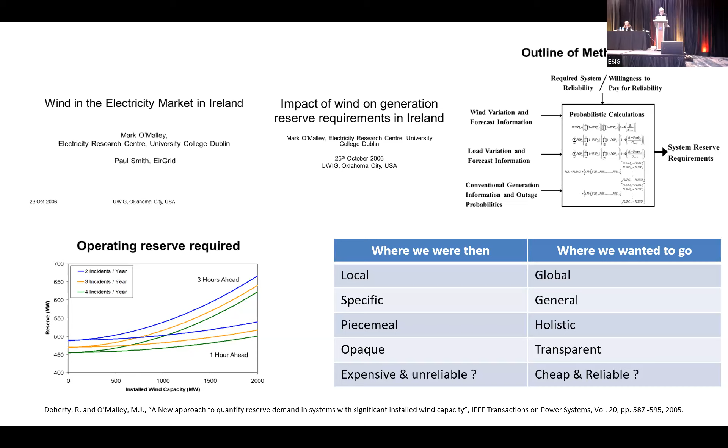Which is sort of just to go back to the past, so now I have to go back to the future. That picture is approximately one hour old, isn't that right? Hands up, who was in that picture? We're missing one - where's Patrick?

Oh, there you go. We're talking as the others were coming in, about system services, weren't we, Patrick? And we came to the conclusion that system services are probably a little bit piecemeal, a little bit ad hoc, and we're not quite, from a methodology point of view, to go back to the previous slide.

There's no real rigorous methodology when it comes to system services. You don't go and someone says, I want new system services - you don't have a methodology. It's not a tech, for example, you don't find in any of the power system textbooks. There's no, so it hasn't become industrialized, processed, or whatever, and methodologies done in it. So that's the sort of the context.

I am on topic, Charlie. Just to go back a bit as well to the GPST that I think a lot of you know about.

So the GPST is six system operators in the world plus some researchers, and this is the research agenda from it, which I think was mentioned yesterday. I've just highlighted services in it - there's 59 research questions, and one of the whole baskets of research questions is services.

And services is, you know, inverter design has capability and service and IBR. So it's a very topical issue, and that's when we applied for the Leverhulme Trust for this grant that I had out of Imperial. It was sort of GPST inspired.

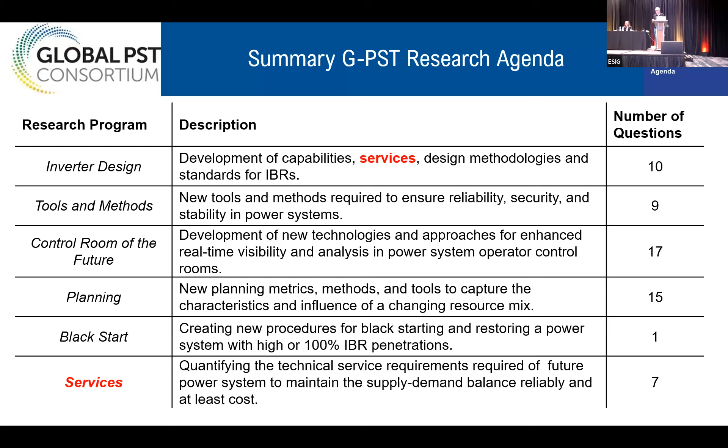This is a slide that I use quite often. I suppose at the very top is balance - the fundamental objective of a power system is to balance supply and demand at minimum cost and acceptable reliability. Unfortunately, my picture covers over the reliability part, but that's fundamentally what this is all about, and it hasn't changed. It won't change, I don't think. That's fundamentally what we do - balance supply demand at minimum cost at some level of reliability.

You can add on attributes to that if you wish, sustainability and all that sort of stuff. And I suppose what's happened in the past number of years, to go from when we were in Oklahoma 17 years ago - in fact, when we were in Oklahoma 17 years ago, it was only really about wind.

Is there a laser pointer in this? Is there? Sorry, is there a laser pointer? I just obviously went through lots of slides. There is a laser pointer.

Ah, yeah, okay. It was mainly about wind, and then it was about wind and solar. And now really it's not so much about wind and solar, but it's actually about the technology, the power electronics that sort of interfaces. I think we've largely taken care of the wind and solar characteristics as a resource - it's variable, somewhat difficult to predict. That work is pretty much done, except for probably on the longer timescales when you need seasonal storage, etc. So it's really the power electronics piece in the middle between the resource and the power system that has become the focus.

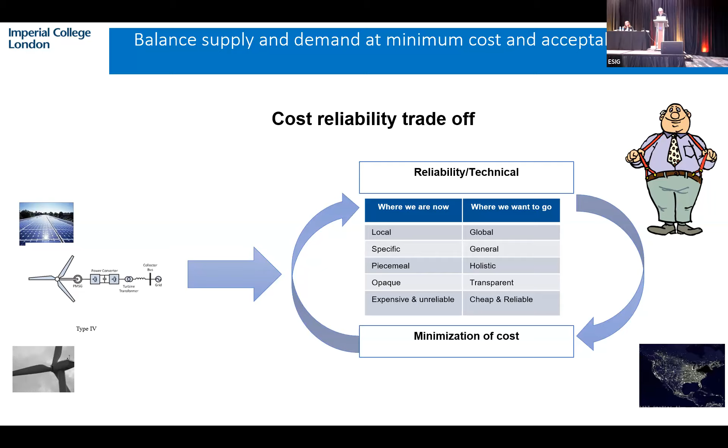One of the things that GPST did a few years ago is produce this report on the left-hand side, system needs and services for systems with high IBR penetrations. I think that was a very successful document—a lot of system operators liked it. It didn't have a huge amount of analysis in it, because if you look at some of the work done here yesterday, there is analysis, but...

If you take what is Deepak—is he in the audience? Deepak is here somewhere, is he? Where is he? Oh, Deepak.

If you look at some of the work that Deepak showed you yesterday, he had a test system and did various analyses—again, I'm not being critical, but I am being critical. We're still at this stage of trying to understand, on a test system and smaller systems, some understanding and insights. We haven't really scaled it up.

The reason I put in the pictures of Sebastian, and I think that's—sorry, Andrew, is it? Will, sorry, Will, yeah, sorry, Will.

I just picked these out at random to some extent. If you look at the talk that Will gave yesterday, you used the word piecemeal, didn't you? Yeah. So I'm just trying to say there's evidence here that I'm correct, that's all. You're a witness for the prosecution.

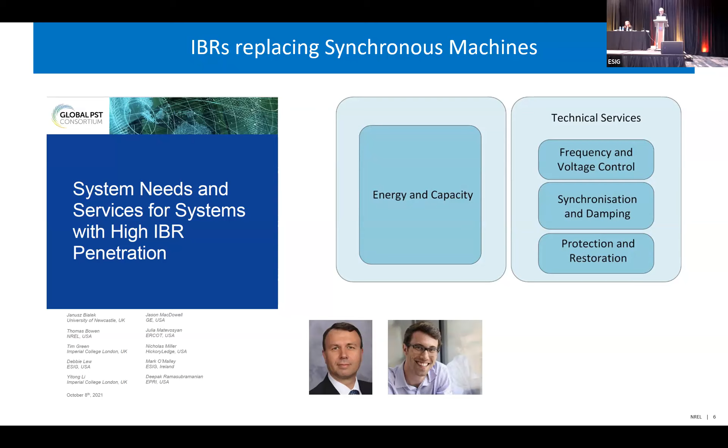It's not that they are different, it's just that they've approached it in a different way. Their actual physical systems themselves may lead to a situation where some of them are different for very good technical reasons, but most of them should be the same. So you can argue with the terminology, etc.

And then just more evidence, whatever. This is a cutoff from a website—on the 9th of October 2023, about two weeks ago, AEMO in Australia launched two new services, 1 second reserve up and down. So there's a situation where people are introducing new services, and the reason on the left-hand side is because inertia in the system is dropping, they're finding the frequency is moving more, etc.

Julian's picture is in there because Julian mentioned yesterday that National Grid ESO introduced some new frequency control services. I know that when I was talking to Julian, they removed some services when they introduced the new ones. In Australia, they didn't—so you get this situation where people put in new services but don't remove old ones. You have to ask yourself why.

So to that end, here, I'll do a poll. Does everyone—I mean, this is a bit simplistic—but does everyone agree that to some extent services is a bit piecemeal, ad hoc? Does anyone disagree?

No one disagrees? Does everyone believe that with a little more rigorous methodology, a little more structured approach, it would be easier to do? There you go, convinced. Now, but how do you do it?

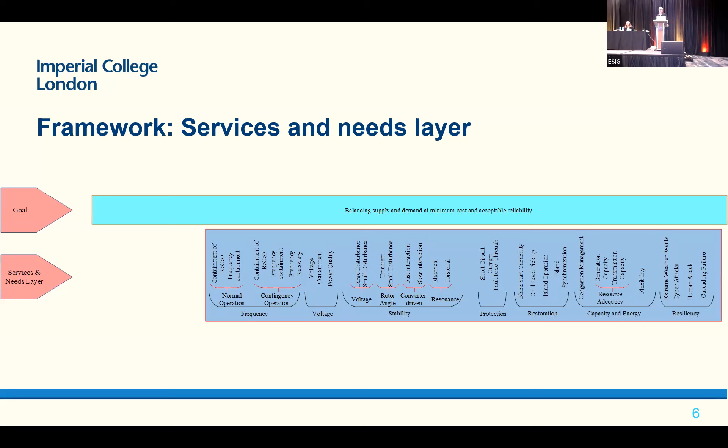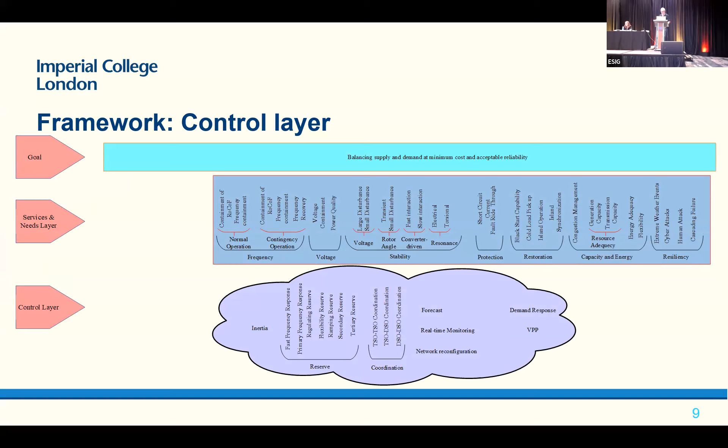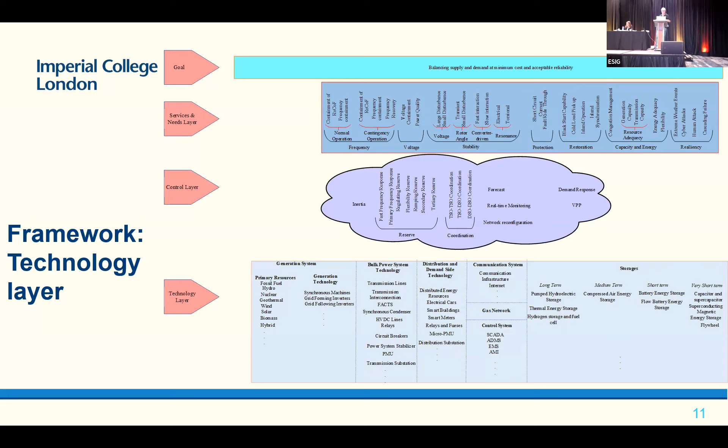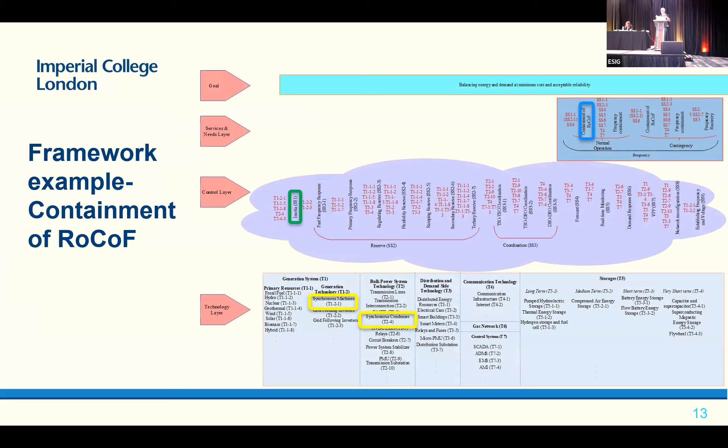And just as an example, if you look at containment of RoCoF, to provide it there are three things in the control layer that can do it. And if you take one of those three things, there are some technologies it needs. So it's a sort of trickle-down diagram, which I think could be useful.

I'm out of time now, but if you bring it all together, I suppose what we're trying to do is put it in the context of a bigger picture. There's the services in there, but if you think about it, it's the system services at the center of the power system that drive everything else.

So if you go out here, the vendors are out here saying, what will I build, what technology? Achilles was here yesterday talking about wind turbines and what he does, and what he's looking for—he was talking about grid codes, and the difference between grid codes and services isn't huge, because a grid code essentially means you have to do it. So you can see the vendors out there are essentially driven by the system services.

And there's also some interaction with policymakers. If a policymaker decides the reliability standards should be greater or higher, it changes things. So it's a bigger context.

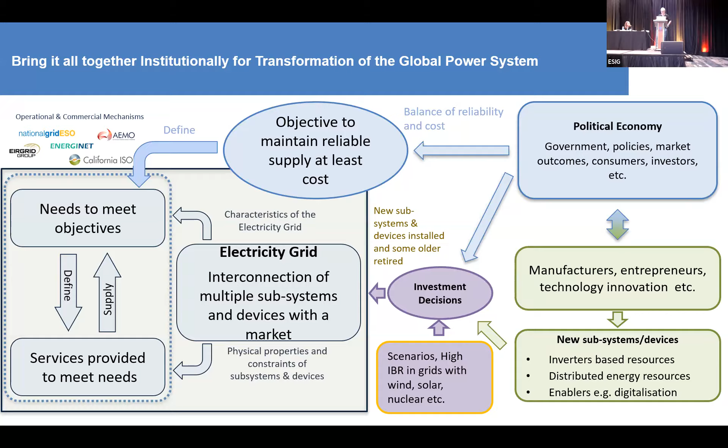So finally, then I got to Deepak's picture in here. Deepak is running this—the framework needs much more work. It's just sort of the basis, the start of it. There's more we've done, but I won't show it. This diagram highlights that if you take cost and reliability, the green area is acceptable.

The top left is infeasible and the bottom right is poor design. You want to be in that green area, but as we keep putting more and more wind or more IBR in the system, we've been pushed around that green area. It's higher cost, the reliability, etc.

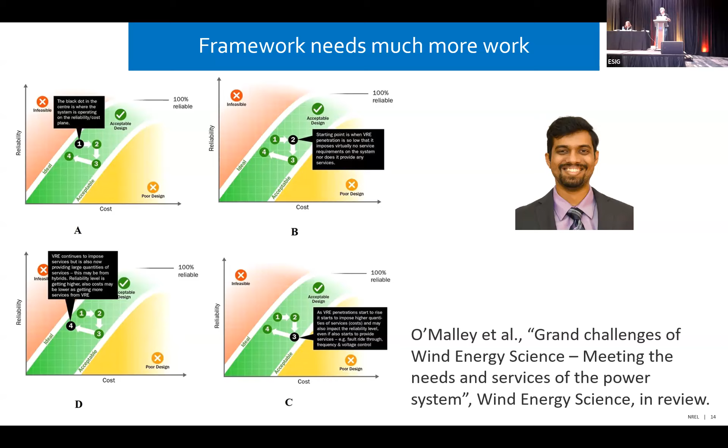So you need to have some analysis and studies that Deepak is doing to determine where you are in that green area. And as you drift towards one of those boundaries, you can't drift towards the infeasible boundary, it's impossible to get there. But if you drift towards the poor design one, you have a situation with poor reliability and extra cost.

I think you all agree the ESIG task force is important to mention. Do you need a framework to do this? I think you do, you need some sort of instruction. We've made a start, more to be done. Thank you very much.

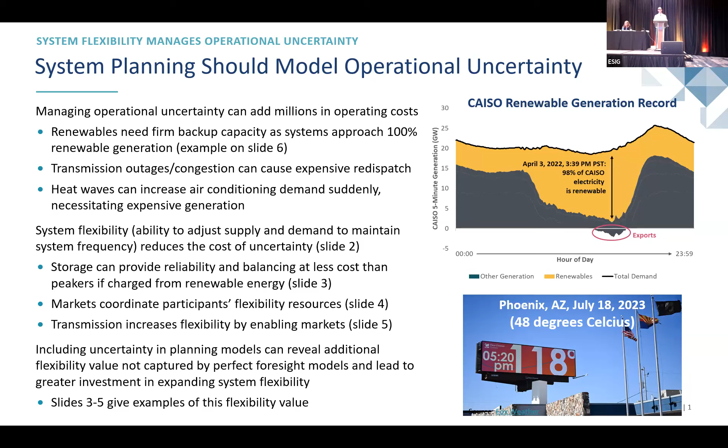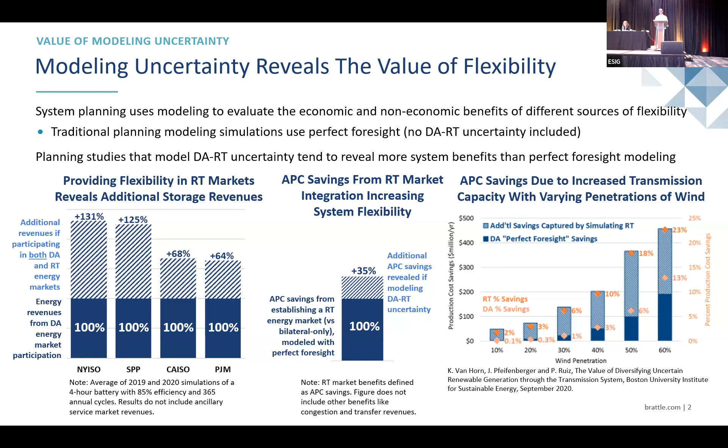So this is all to say that including uncertainty in your modeling can really expand the view of flexibility value that you get from your study. So now we're going to talk about these examples one by one and go a little bit deeper. Flexibility resources like storage, they're used to balance the system. What that means in the modeling world is that they're just maintaining supply and demand balance.

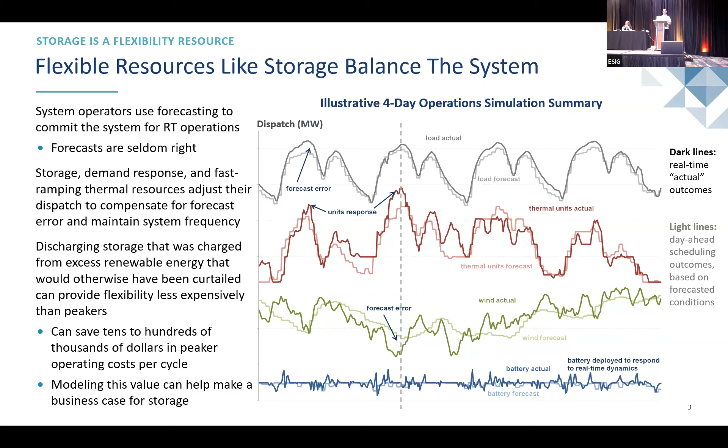So what do you do? One option is to adjust your thermal resource dispatch to flex up. You might need to call on an expensive peaking unit to step in and provide some additional juice to the system. Another option is that if you charged your storage resource from renewable energy, you can just discharge that and displace some of the need for flexing up your expensive thermal resources. In this way, you could save a lot of money from avoiding peaking usage by relying on low-cost flexibility resources.

Now, markets provide coordination. They're like the air traffic controllers for multiple entities. There's a few levels on which markets can provide flexibility. In the day-ahead time frame, you're positioning the system to manage uncertainty, doing the forecasting, doing unit commitment for your footprint, and procuring the types of services that Mark just talked about - spinning regulation, things like that. Then in real time, now that you've positioned your system to deal with uncertainty that manifests, the market will redispatch and shift the resource distribution to meet the actual realized demand.

So right now we're in an interesting time because several non-RTO regions are looking at market integration. This is big news because we haven't seen new markets being formed in decades. These types of questions about how do I form my market, what happens if I participate, should I participate, what kind of market should I participate in - these questions rely on modeling to get a sense of what's going to happen in the future. When you're dealing with hundreds of millions of dollars in potential market benefits from integration, you want to be simulating forecast uncertainty, operational uncertainty in the day-ahead real-time time frame and beyond, so that you can really maximize your view on the potential benefit you can get.

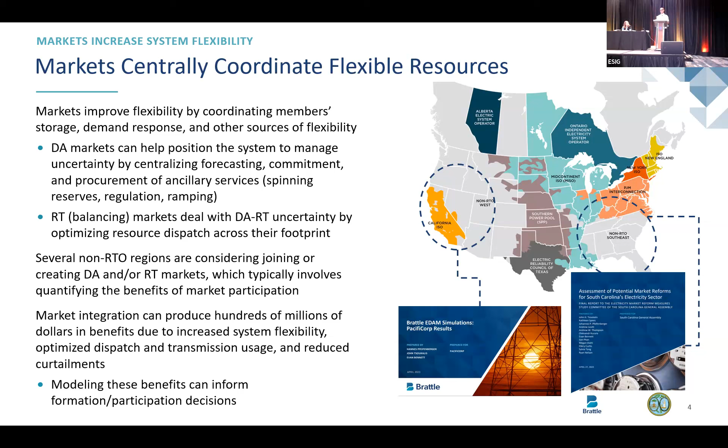Next, transmission enables markets, right? You can't be trading if you're not connected to your neighbors. And the way transmission specifically helps with flexibility is by connecting different diverse regions with different diverse resources.

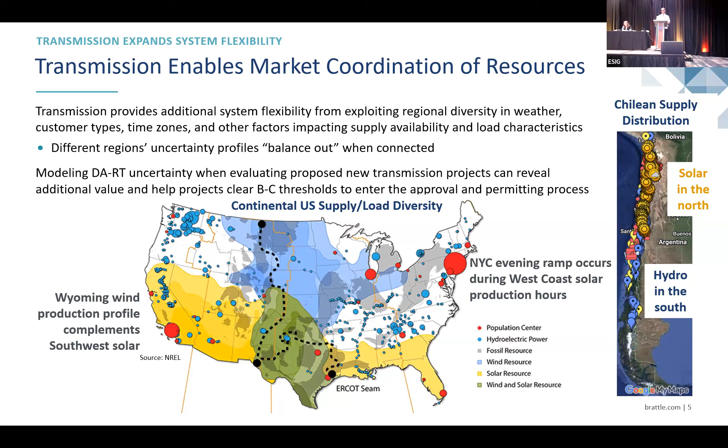Next, I'll give an example of how planning for uncertainty can save millions of dollars in operating costs. In this system, we're looking at a small system that is looking to expand their renewable generation, striving for 80% in this case.

For as much of the remaining net demand as possible, you're going to be generating wind energy because it's cheap, it's free. But because wind energy can fluctuate minute to minute, you need to keep a thermal resource online to provide balancing services. Having this thermal resource online can actually displace some of the utility-scale solar and wind on your system, because otherwise you risk overgeneration.

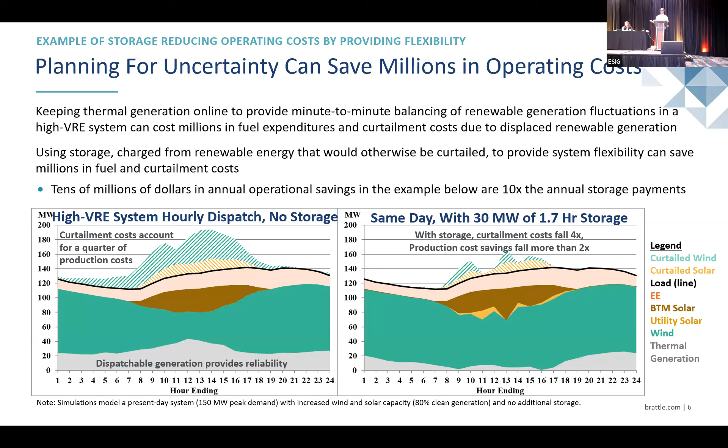There's many forms of uncertainty beyond the day-ahead real-time timeframe, and Selin is going to get into that in terms of resource adequacy planning. But you need to be prepared for all of it. It's not just looking at operations and whether I dispatch storage—it's also how my demand is changing year over year.

We saw an example recently where rate structures were over-incentivizing behind-the-meter solar, and customers all of a sudden had more money in their pockets, so they decided to put in a second air conditioner in their home. That increased system demand by quite a lot year over year.

It's an unexpected situation. Sometimes you might have a crypto mining operation that comes into town. You need to upgrade your transmission and distribution system, maybe procure additional generation, and then the crypto mining vanishes. This happened a few times in the last few years.

Similarly, supply can also change. There's extreme weather and droughts, which can upend some of your resource planning. There's fuel pipelines freezing over, supply chain issues delaying delivery of renewable resources, and geopolitical factors impacting how much fuel you can get. All of these are uncertainties, and they can become expensive if you need emergency measures to address them. So system planning should account for these types of uncertainties.

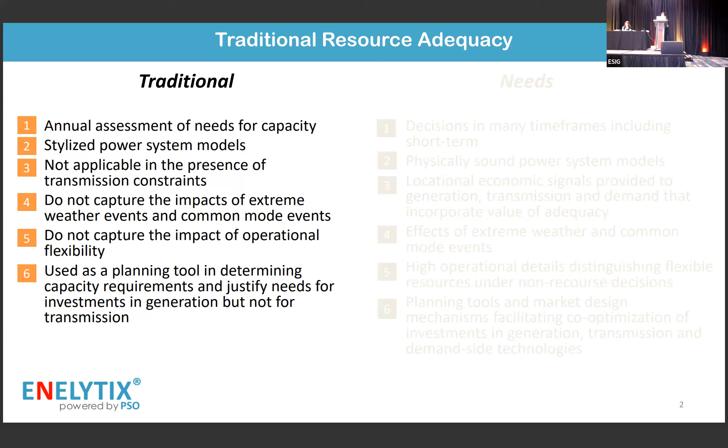So how is it usually done? It's a planning tool, mostly excluding the physical and operational details in the system, but transmission changes the story a whole lot. System-wide metrics are not quite applicable when we have transmission congestion in the system. And same for operational details - excluding those makes valuing flexibility very difficult, and conversely, assessing the true limitation in the system due to operational constraints.

So we think we need a new approach. First of all, it's not just long-term planning. All decisions and all timeframes have reliability impacts, including short-term. So do I have enough for the next few days in the face of an extreme storm coming? And we need physically sound power system models as well as operational details.

So including transmission as part of the decision process is not an afterthought - connecting the gap between investment decisions and transmission. Same for operational details, distinguishing between flexible resources in the system versus inflexible resources. So what flexibility do we have in the system to address surprising contingencies, including outages and weather, and also market signals to provide to all types of participants, generation and transmission.

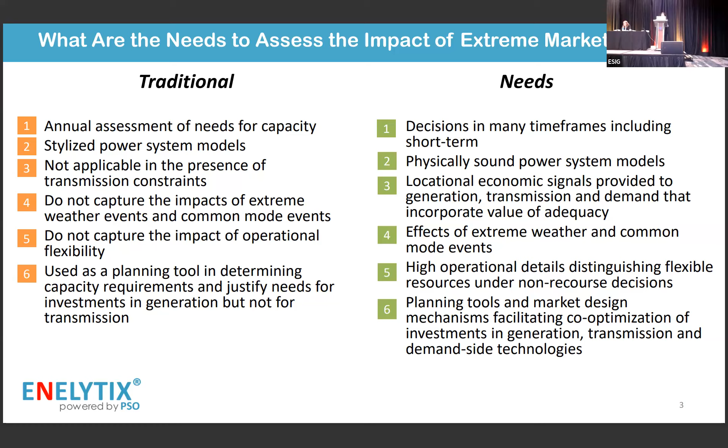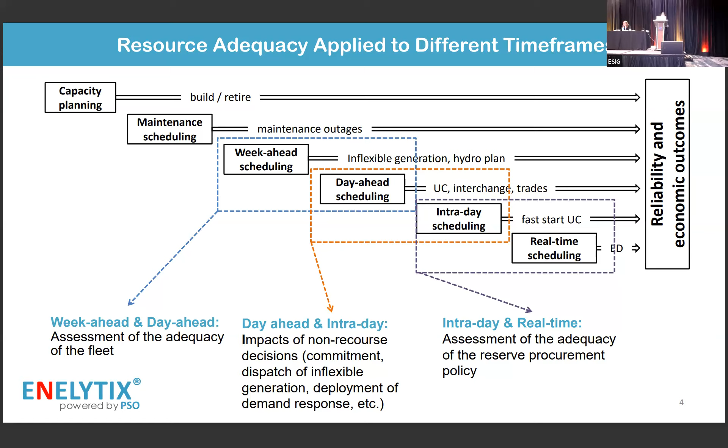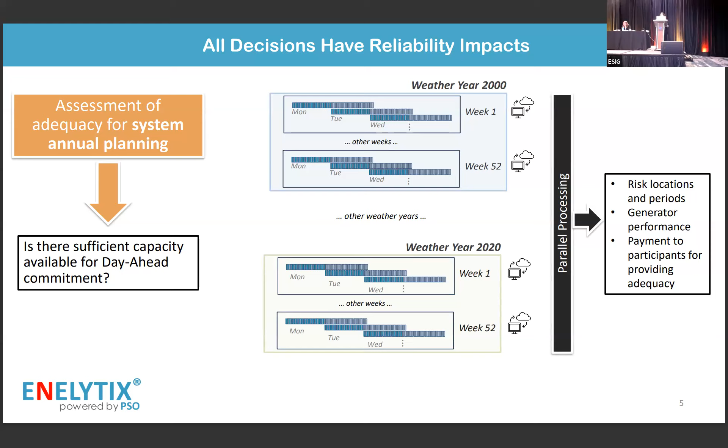So following up on that, some use cases. Again, all decisions have reliability impacts. If you look at an annual system planning timeframe, the question there is, do we have sufficient capacity available for day-ahead commitment? So we can think of multiple historical weather years, all processed in parallel, as well as the time periods in the year. It can be partitioned into weekly periods, bi-weekly periods, or monthly periods, depending on the length of the decisions in the system. And from this analysis, getting the risk locations and periods in the system and generator performance.

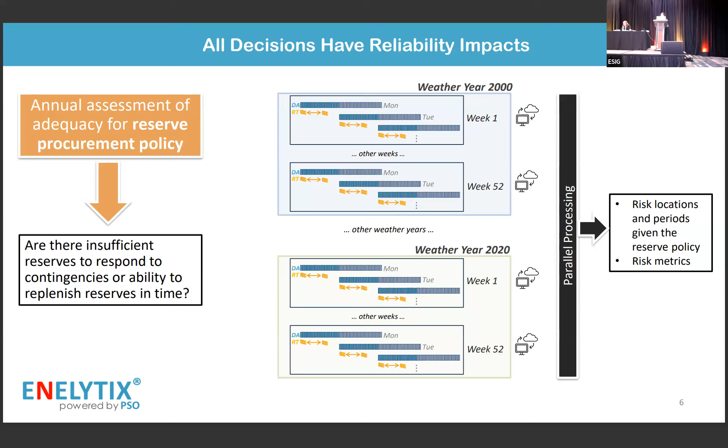Another annual use case is this time bringing the real-time decisions, looking at the reserve procurement policy. Do we have sufficient reserves in the system to respond to surprising contingencies, or are we able to replenish reserves in time? So same idea, processed in parallel using cloud computing.

Looking at short-term planning for the next five days, the question there is, do we have enough reserves to respond to contingencies? This is actually a project under development funded by EPRI. You can think of it as a continuous assessment - so every day making decisions with some baseline forecast, and then looking at the multiple weather contingencies coming up and repeating this analysis daily.

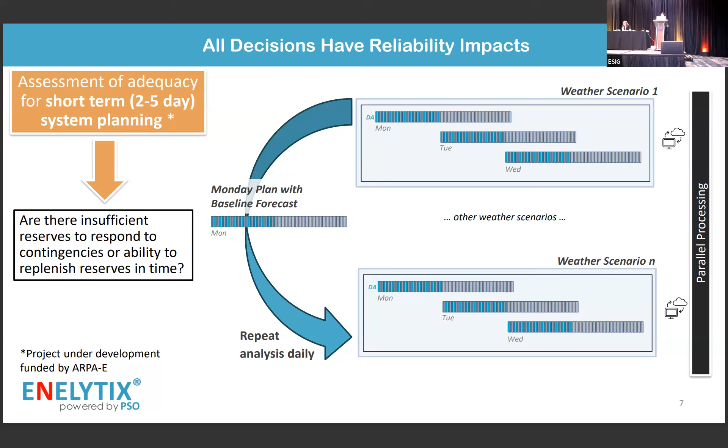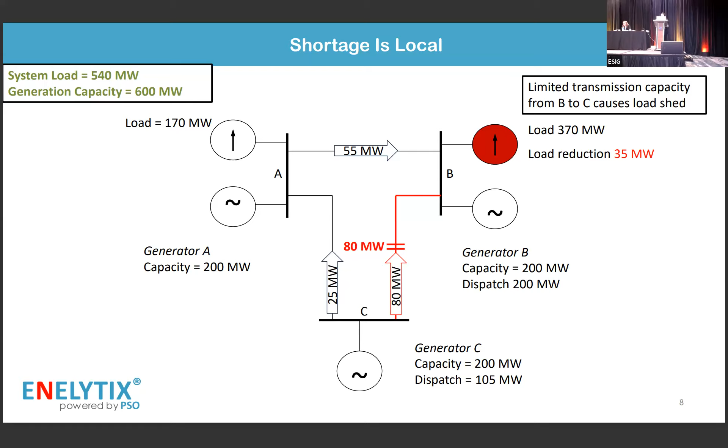One important message, before we move on to some illustration of these concepts: shortage is local. Looking at this very simple 3-bus model with load and generation in every bus, system-wide capacity is sufficient, but due to limited transmission capacity between bus B and bus C, we have a load shed in location B. So if we assume the value of lost load is $10,000 per megawatt hour, that event sets the price in that location only to VOLL, and not in other locations.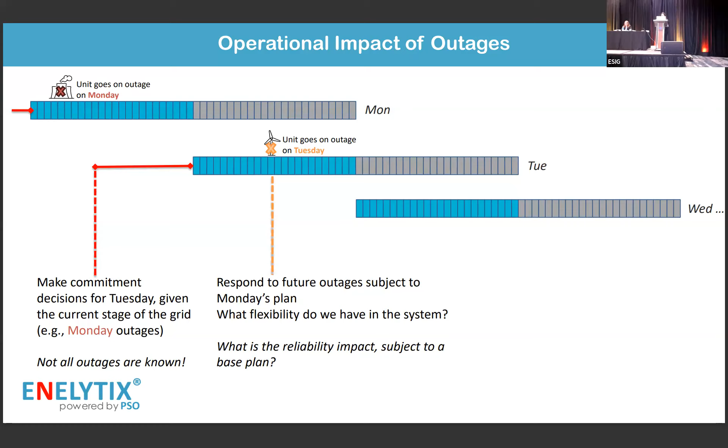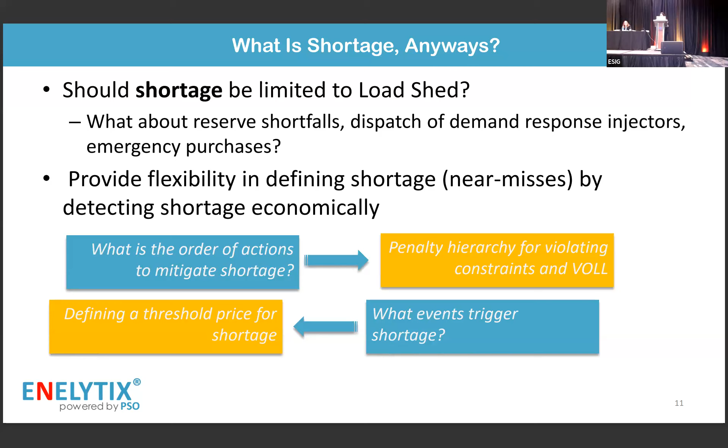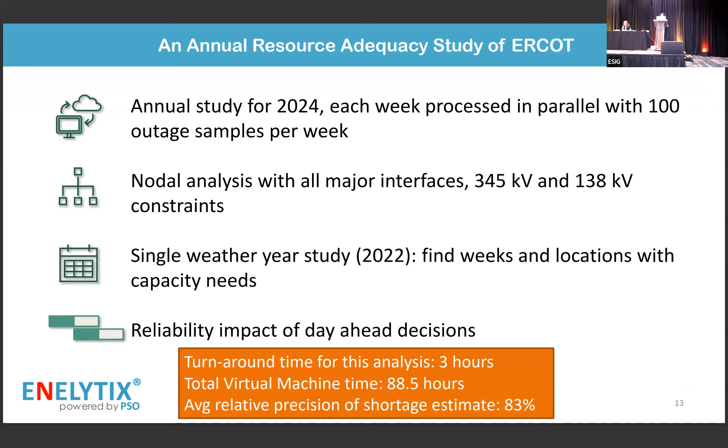This study took 3 hours to turn around from start to getting the results. But if you look at the total cloud computing time or virtual machine time, it's about 88.5 hours. Given the machine we used, I think it translates into $12 or so. The average relative precision of the shortage probability estimate came to 83% using 100 outage samples per week.

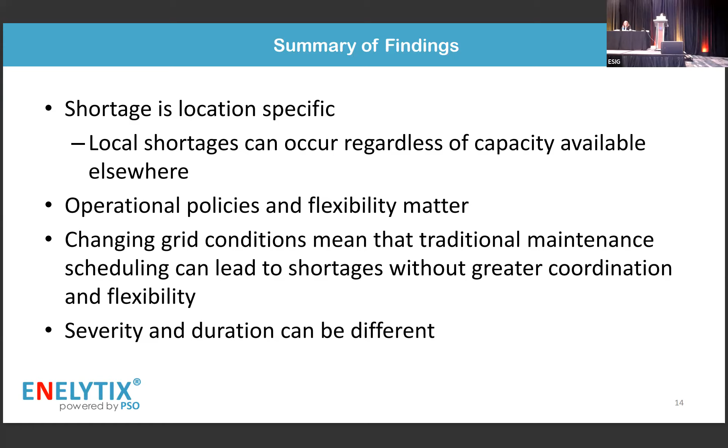Let's start with a summary of findings before we go into detail. Shortage is location specific - we can have local shortages due to transmission, regardless of capacity available elsewhere. Operational policies and flexibility matter: how do we schedule maintenance, how do we schedule reserve requirements, and so on. And severity and duration of an event can be different.

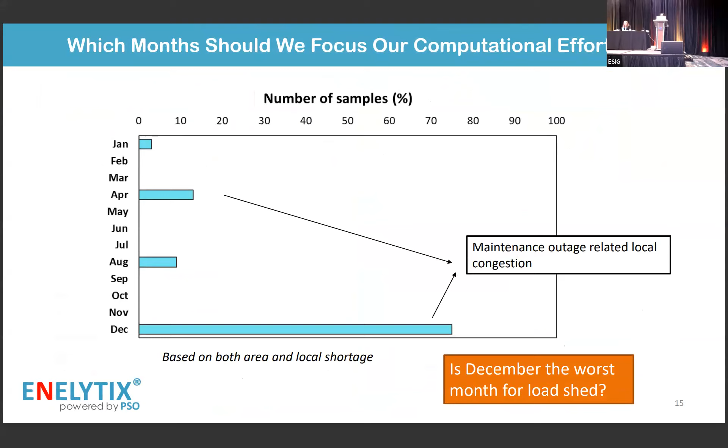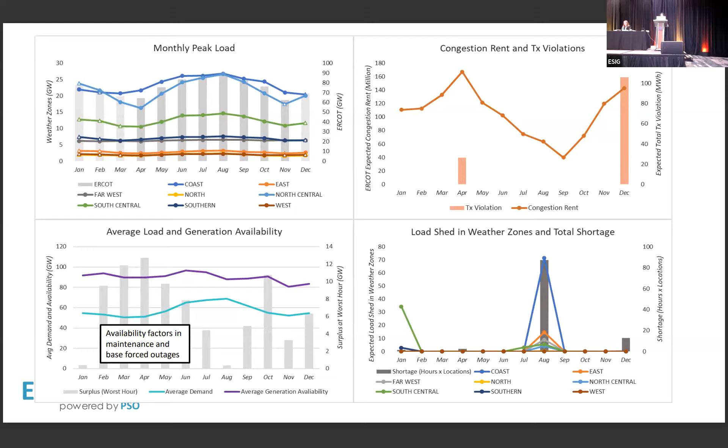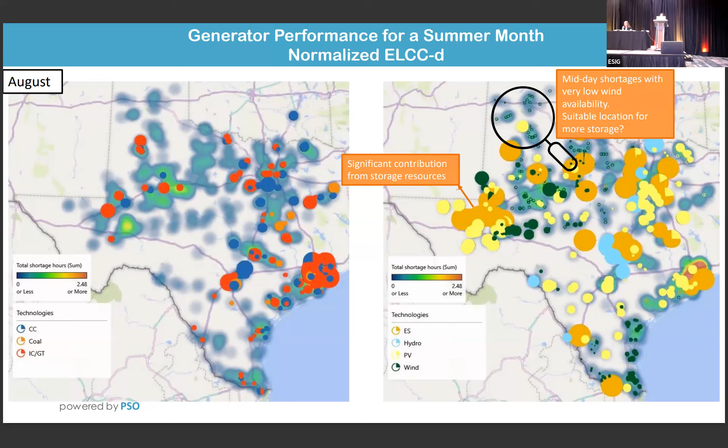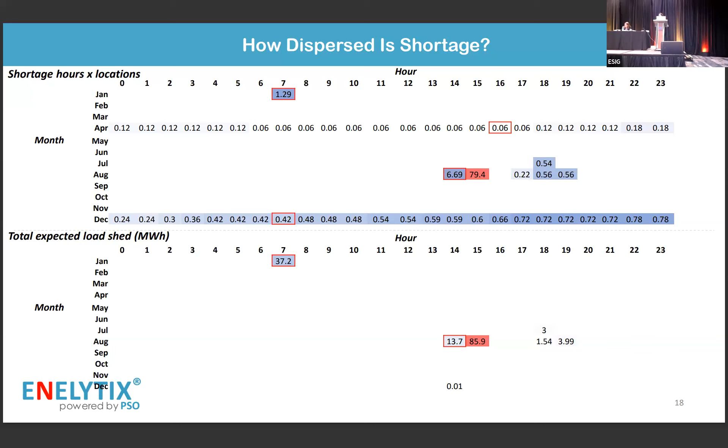So the answer there is actually we have local congestion due to combined impact of fixed maintenance and unplanned outages, and it cannot be economically resolved through area level load shed.

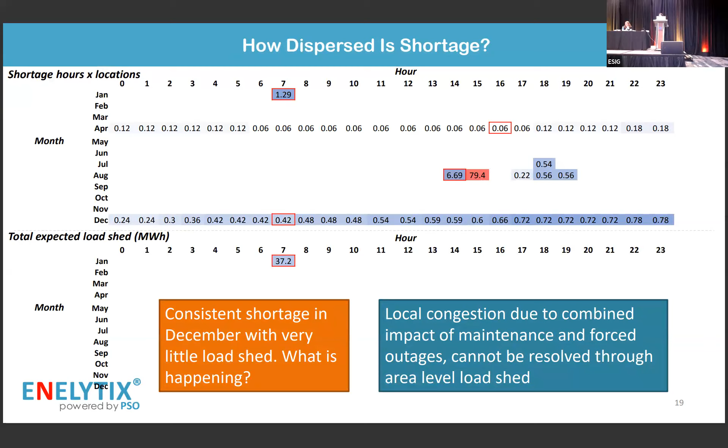So let's talk about another metric, which is how local versus how widespread is shortage. Going back to our simple 3-bus example, where we have shortage in only one location due to the limited transmission capacity, this metric basically measures how local the shortage is. It's the total dispatch in shortage locations, or total dispatch exposed to shortage, divided by the total system dispatch.

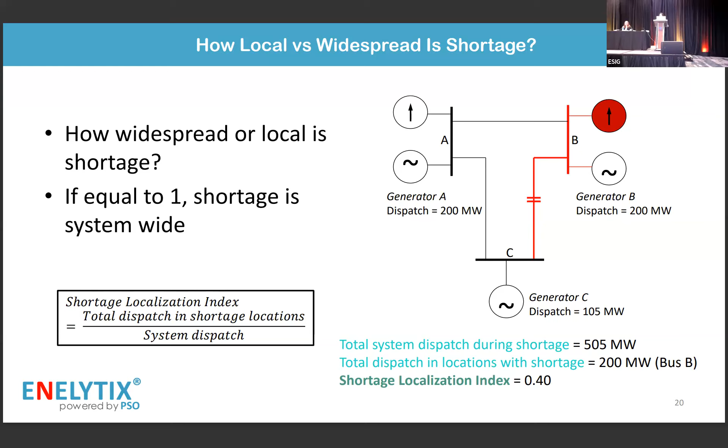So in this example, we only have generator B that is exposed to shortage. If we divide that by total dispatch in the system, the shortage localization index, as we call it, is 0.4, indicating that we have a local issue. If this value is equal to 1, shortage is going to be system-wide, meaning we have all generation exposed to shortage. So if we look at this shortage localization index for each month, and this is the spread for all the outage draws, we see August has the localization index close to 1, meaning that it has a system-wide issue, whereas December is very close to 0, meaning it has a very local issue, in every other month actually.

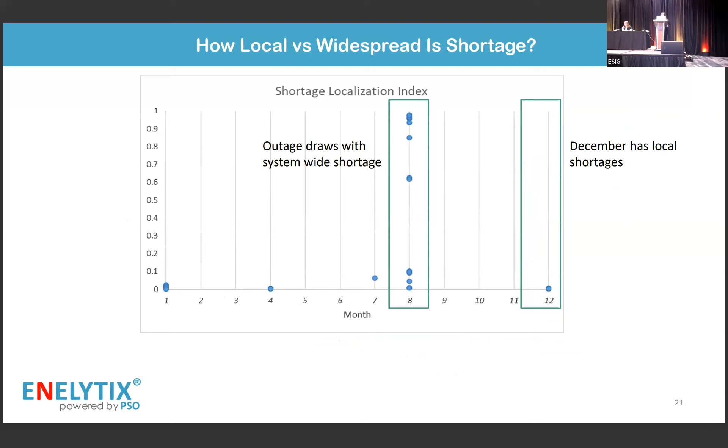We can also see that by looking at how much total generation is exposed to shortage. Again, December has shortage in each hour, but only a portion of the generation is exposed to shortage, whereas in August, this number is much higher, but it's concentrated in one hour.

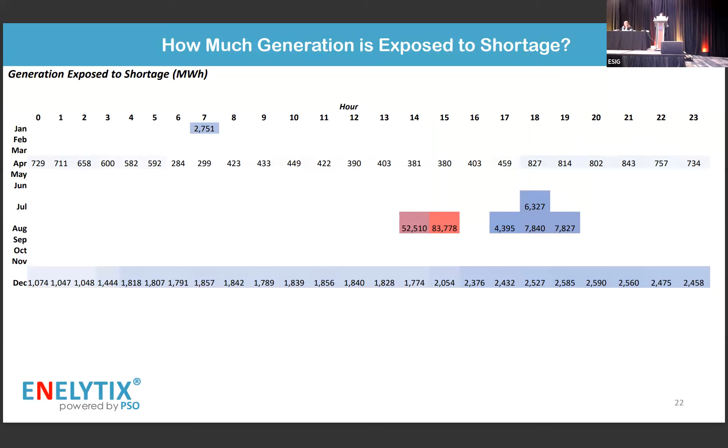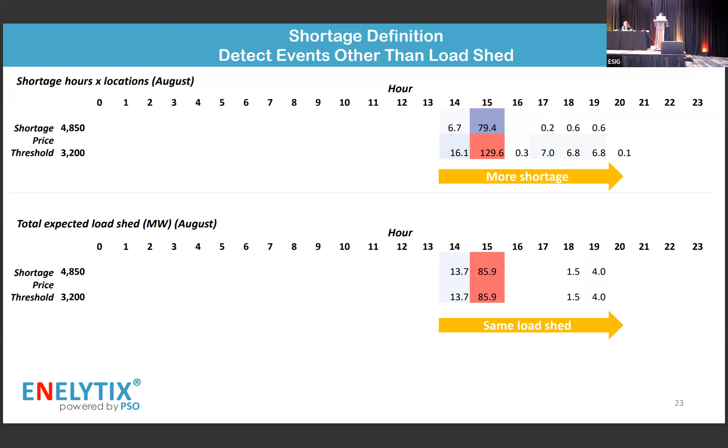So let's go back to our general definition of shortage. In these examples, we were only detecting the load shed events and transmission violations as shortage, but what about other events? So we reran August, that has a system-wide issue, with a lower price threshold, meaning we might catch other events as shortage events. If you look at load shed, it's exactly the same, but if you look at the total shortage hours and locations, we actually have an increase. So what are those events that we didn't catch before? Those are actually reserve shortfalls and/or congestion price.

If you look at one particular draw that we didn't catch as a shortage before - ERCOT has 2 reserve curves, online and online plus offline. There's a shortfall for online reserves in that hour. So we're now catching this event as shortage that we didn't before, when we had a price threshold that was equal to value of lost load.

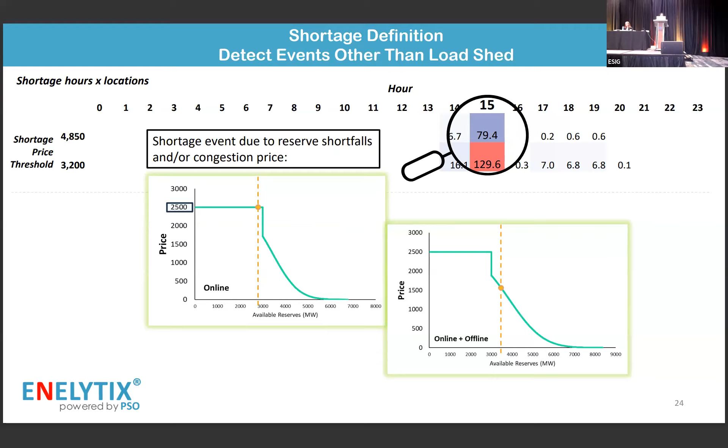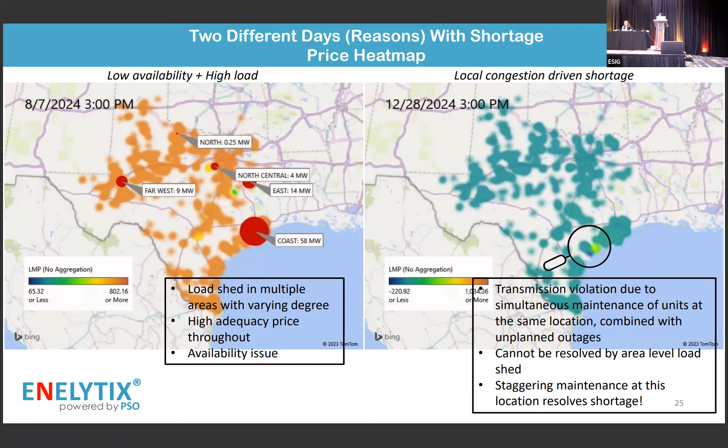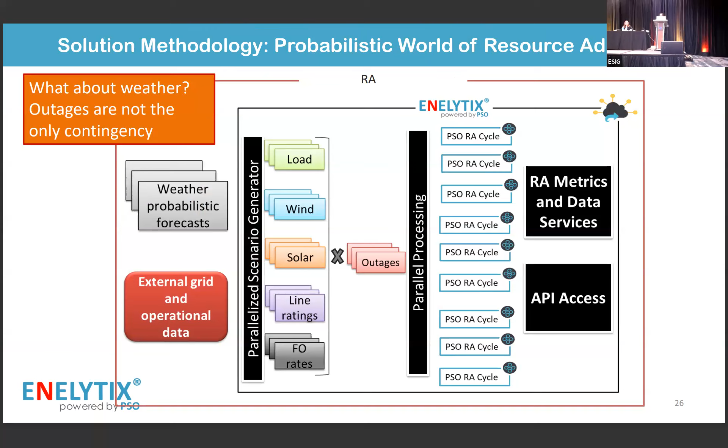So the question is, what about weather? Outages are not the only contingency. In the face of weather and multiple generation outages, how do we solve this in a reasonable time? If we think of weather scenarios translated into load, wind, solar, and for each of them look at multiple generation outages, how do we efficiently evaluate possibly tens of thousands of those scenarios? So we have some computational tricks for that.

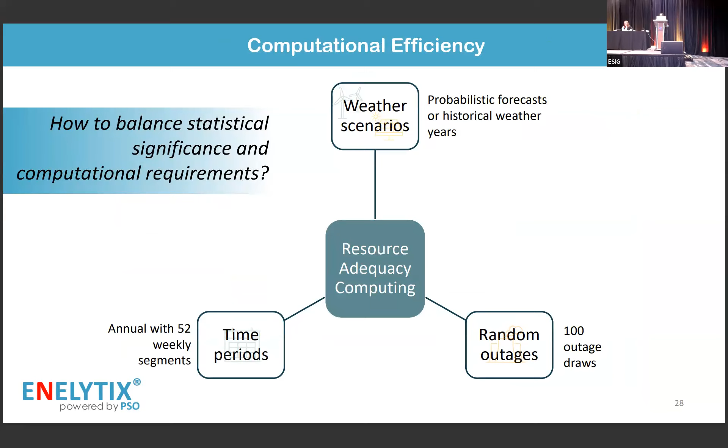There are multiple dimensions to it. There's the weather scenarios and time periods aspect, which we handle through stratified sampling, which I'll talk about in more detail. In terms of the random outages, we have an integrated scenario reduction, integrated within the optimization, which I'll also talk about.

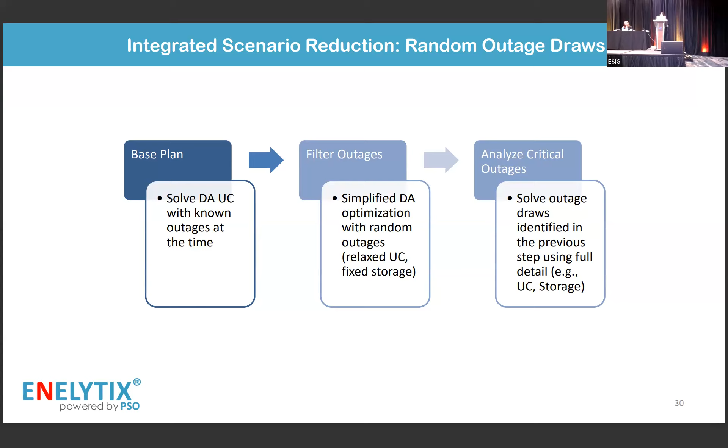Starting from the random outage dimension, which is integrated as a scenario reduction within the optimization, we start with a base plan: solving the day-ahead unit commitment with known outages at that time, then using a simplified formulation for day-ahead optimization with random outages. That can be relaxed unit commitment, fixed storage from the previous step, and so on, to quickly filter through critical outage samples. For those we detect as critical, we solve only those in detail using full unit commitment, storage optimization, and so on.

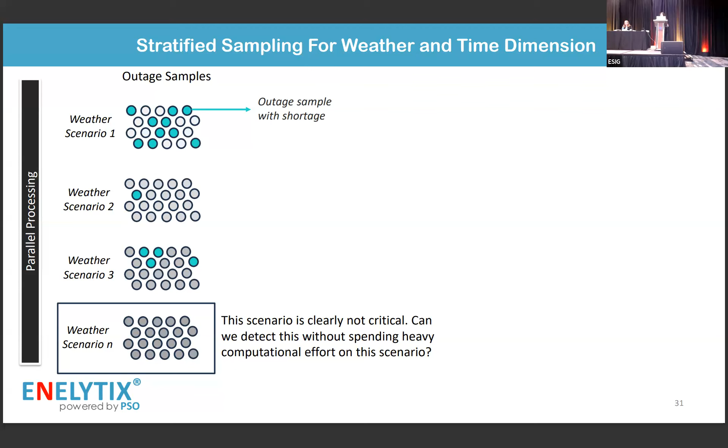If you think about the weather dimension and the time period dimension, we employ a stratified sampling methodology. If you look at this picture, we have the last weather scenario that we evaluated with multiple outage samples - it's clearly not a critical scenario. So do we really need to evaluate that many outage samples for it and waste computational effort? The idea is, let's run some number of statistically significant outage samples for each weather scenario and for each week. I didn't put the time dimension here for simplicity, but it's the same idea.

Only those that have some shortage, we run more outage samples for. It's an efficient allocation of our computational resources, and that allocation depends on how much variance of shortage probability estimate we get from the first stage. The idea is to evaluate more outage samples for the interesting scenarios. In this example, the last weather scenario that exhibited no shortage in the first stage - we don't bother running any more outage samples for it.

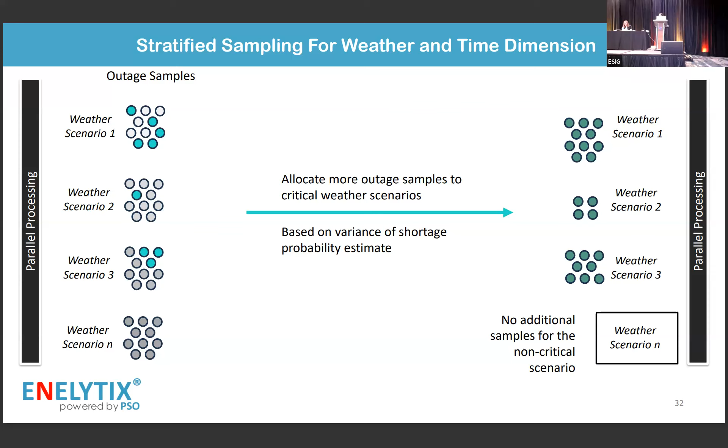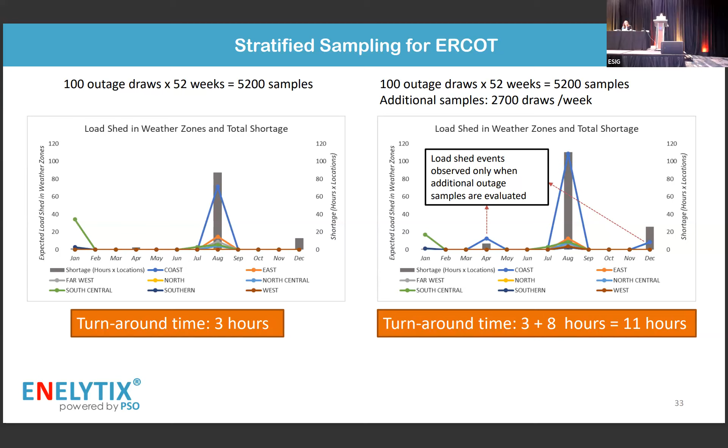To bring it all together: resource adequacy can assess impacts on a physically detailed nodal model and operationally accurate model - there are many examples of that, like unit commitment and power flow constraints. Assessment should be both for planning and operational studies, answering different types of questions. And operational details should be part of long-term planning as well, because they impact study outcomes a lot - things like not all outages being known in advance, and not all decisions being flexible.

I illustrated today the inclusion of the transmission model with unit commitment and storage optimization, but there can be other modeling options - sharing with neighbors in the face of contingency, impacts from other energy systems, synergies with the gas system as well, and participation from load. All of these can be looked at. And that's all from me. Thank you.

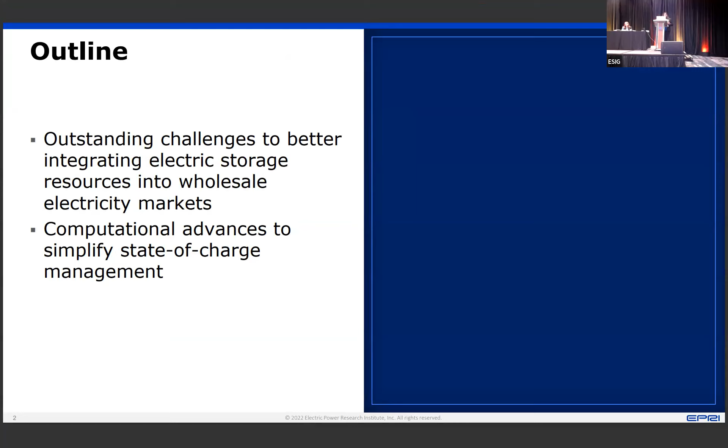I'll start by introducing the outstanding challenges to better integrating these resources into wholesale electricity markets. Then I'll focus on one challenge, enhancing computational efficiency, and a solution for that. At EPRI, we are beginning to work on addressing these different challenges through different projects. Just to start, I've divided these challenges into different buckets: the day-ahead market, real-time market, ancillary service market, and miscellaneous.

FERC Order 841 was very instrumental in integrating these resources into electricity markets. It enabled participation of these resources in energy markets, ancillary service markets, and capacity markets. What was essentially done is the ISOs responded by introducing a participation model for these resources to participate. But the devil is always in the details, right?

The two regions where we're seeing increased penetration right now are California and Texas. Based on what we're seeing, there are a lot of modeling challenges. They're having to make changes to the market clearing software on the fly. It's pretty much like driving the car and having to address changes and issues with the car while you're driving it.

One challenge is computational advances needed to simplify state of charge management. FERC Order 841 required all ISOs to allow batteries to self-manage their state of charge, but two ISOs also allowed the ISO to manage the state of charge of these batteries. We've conducted prior studies showing that ISO management of state of charge might be more efficient, resulting in reliability benefits as well as profits for these assets. But the hurdle with ISO managing state of charge is that it can be computationally complex.

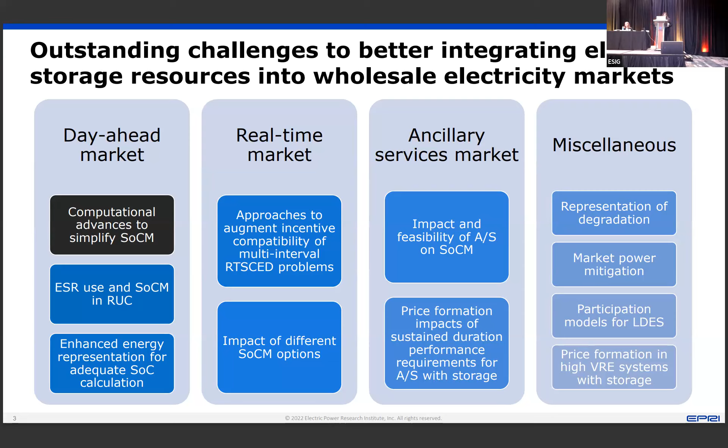We have a lot of research going on for many of these challenges I just introduced, but let's focus on the computational advances to simplify state of charge management, because this is a big one. If the ISOs were to choose managing the state of charge of these resources, it results in better economically efficient solutions, reliability and profit to the generator. But the one hurdle was computational tractability. So we looked deeper into how we could address that.

We have this report published, which is available if you scan this QR code. This work was done in collaboration with my colleagues at EPRI, Walid Aslam and Erik Ela, as well as Russ Philbrick from Polaris Systems Optimization. We tested these approaches within the simulation tool, Power System Optimizer, the PSO.

The motivation behind this work was to ensure that we could manage the state of charge of these resources from the ISOs, and at scale. By scale, I mean we ran simulations with thousands of batteries in the picture with different configurations, which could vary in terms of megawatts and duration specifications of these batteries.

So what I'm going to do is introduce you to the traditional formulation. What does the traditional formulation look like when you explicitly track the state of charge in the operational time frame? And then also introduce an alternate formulation that we refer to as the wrapper energy constraint formulation, and compare the two formulations in terms of computational efficiency, because that was the whole idea behind the study.

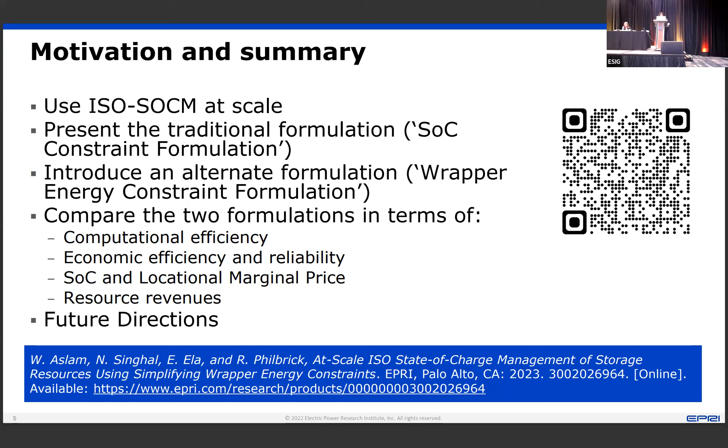And then, if we were to switch to this wrapper energy constraint formulation, how does it impact economic efficiency, reliability, the state of charge profile of the batteries, as well as price formation impacts? And the one key thing participants would want to know is how it impacts the revenues of their resources, and a few future directions we've thought about.

So digging deep into the traditional formulations, and committing the cardinal sin of introducing equations here, because I realized I haven't seen any presentations in the last two days with equations, but bear with me, it's just six equations. So the traditional formulation essentially requires the complexity that comes from requiring the chronological hour-to-hour modeling of state of charge trajectory.

You have to model what the state of charge is in every single interval. And what you do in one interval with respect to discharge and charge can have an impact in the future interval. So there's this whole temporal coupling aspect that can create complexity.

A second complexity comes from introducing a target state of charge, or a desired state of charge level, that would be enforced at the end of the optimization horizon. So these constraints are essentially time-coupled and hard constraints, which make this problem really hard to solve.

We've actually heard feedback from ISO New England, wherein they tested managing state of charge of the batteries themselves, and they were limited to just 25 batteries. If they were to have more than 25 batteries, they could not continue managing the state of charge of the batteries themselves, because they would not be able to solve the day-ahead problem in time to post the solution. And, digging deep into the constraints, what do they look like?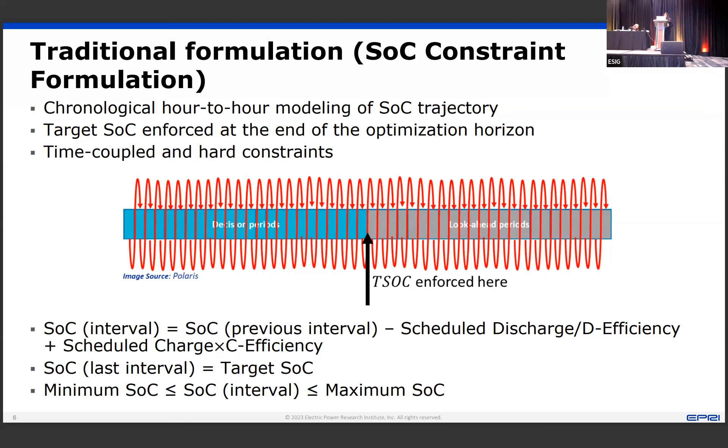go beyond the bounds, the minimum and maximum state of charge limits. So you see there's this daisy chain of constraints wherein you have to model all the time periods. And this, for instance, for one single battery, let's say if you have 24 intervals in the day ahead, you would have about 48 constraints here, and then 24 different constraint sign restrictions on the state of charge variable on the minimum side as well. So think of it as 72 constraints.

The alternate formulation that we explored is something what we call as the wrapper energy constraint. Now the idea here is that instead of explicitly modeling state of charge, you are enforcing the trajectory of the state of charge and target state of charge implicitly. And this is done through monitoring what the energy exchanged is over a time window.

So a time window here is defined as, think of it as a chunk of time. So let's say if you have 24 hours in the day ahead problem, you could have one time window, and that time window is essentially 24 hours long. You could have two time windows, each of which is 12 hours long as well. And that depends on how you would determine these, what the time window should be, can be based on some heuristics of past data. If you have some forecast into what the prices look like, what does the daily cycling

pattern of the battery looks like, you could use that information to set what the time window is. So the idea here is to reduce the explicit modeling and the number of constraints and variables required from explicit modeling to an implicit modeling.

So the first constraint here is essentially to account for the efficiency loss of the battery. So the sum of my discharge decisions and the charge decisions should be equal to what the state of charge was at the beginning of the time window minus what the target state of charge is.

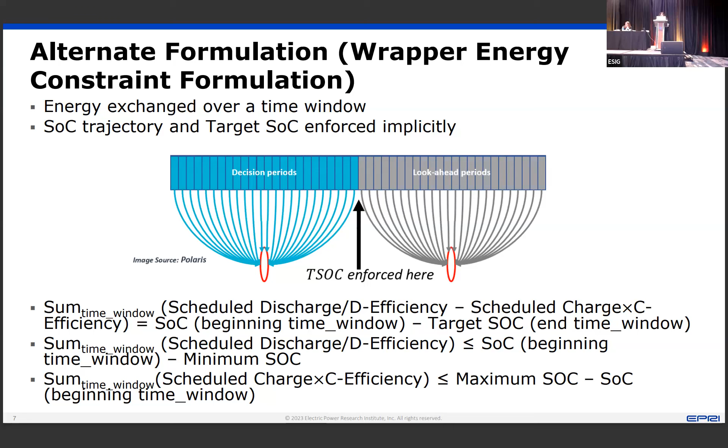So we tested these two formulations on a New York ISO test system. We had a zonal model of the New York ISO system with 11 different areas. And I'm just going to get into what the battery specs looked like.

We had about 1,000 different batteries that were introduced across 6 different areas within these 11 zones. And the megawatt capacity of the batteries ranged from 3 megawatts up to 40 megawatts, and we had a total of about 8 gigawatts. Note that New York has an aggressive target of having about 6 gigawatts of battery in the next few years by 2030 anyway, so we just bumped it up a little bit more.

The megawatt hour capacity durations we chose were between 2 to 10 hours. We conducted these simulations mostly in the day-ahead timeframe because that's where the complexity issues are, and we also did co-optimized energy and ancillary services.

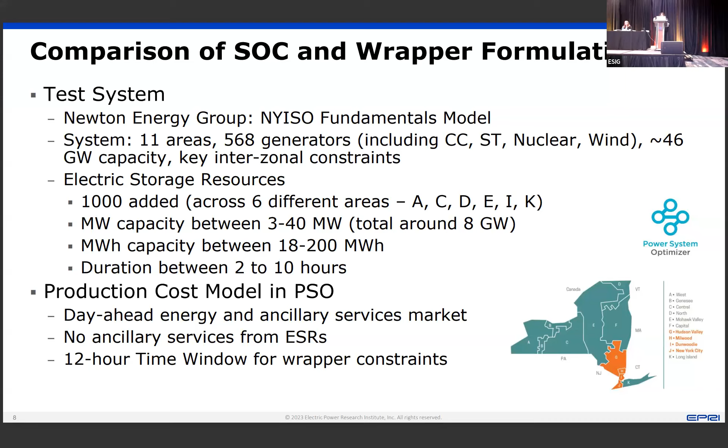One thing we did not consider is ancillary service provision from storage, because we wanted to focus on energy provision first before extending these wrapper constraints to also consider ancillary service provision. We started with a 12-hour time window because that's how we saw the batteries being used for ISO state of charge management anyway, just a single cycle in a day.

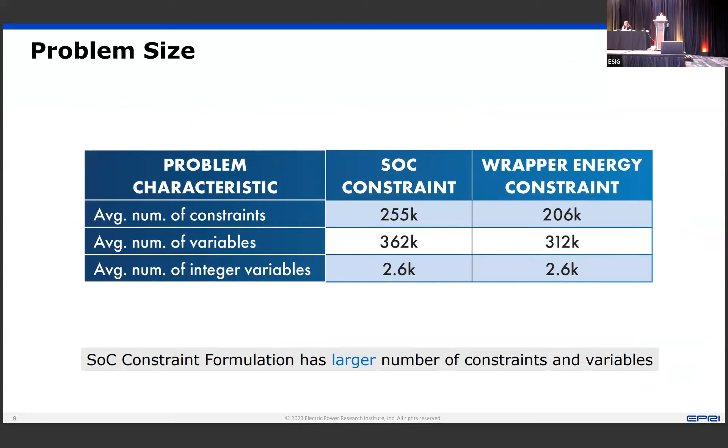In terms of problem size, the state of charge constraint formulation, as expected, had a larger number of constraints and variables. The average number of constraints and variables in the state of charge constraint is much larger compared to the wrapper energy constraints. This resulted in the computational solve time for the state of charge constraints being higher.

Now, the other impact to consider: how did production costs change with these two constraint formulations? When we looked at the average cost across the year, the figure shows the cost on each day. For the average daily cost, the state of charge constraint performed better in general, which is expected because you're explicitly modeling state of charge, while there are some approximations in the wrapper energy constraint.

There was an average 0.43% increase in operating cost with the wrapper constraint formulation, so it didn't perform as well as the state of charge constraint formulation. Also, for the geeks in the room, the MIP gap was set to 0.01%, so you can relate that to what the production cost savings mean in percentage terms.

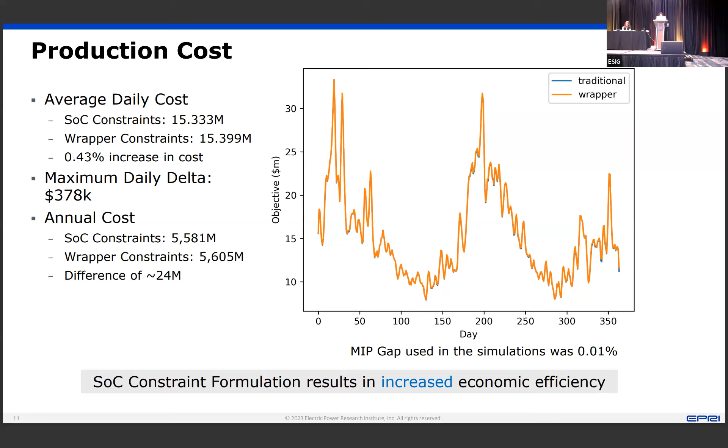If you look at the annual cost, the difference between these two approaches was about 24 million. That's significant -- over a year, you'd have a 24 million difference in production costs between the two formulations, with the state of charge constraint being better. But I'll talk more about how we narrowed that gap in future slides.

If you're curious about the state of charge trajectory and the LMP impact on prices from these two constraints, we've shown figures for one single battery for illustration purposes: a 12.5 megawatt battery with 4-hour duration and 0.85 charging and discharging efficiency. We started with 50% state of charge, shown on the figure on the left, and also ended with 50% state of charge at the end of every day. There are about 6 dotted lines representing 6 days in a week.

For the wrapper energy constraint formulation, the time window was set to 12 hours. You can see the orange line charges up and then discharges back, returning to the same point it started at the end of the time window. Whereas with the traditional constraint formulation, you may see better behavior where discharging is restricted to times when prices were actually high.

There is a concern that you'll see lesser utilization of electric storage resources with the wrapper energy constraint formulation. Since the traditional approach has better utilization of storage, that results in flatter prices -- the LMPs as well. Consequently, on the right-hand side, you can see a flatter profile for the traditional approach versus not, and this can be a concern.

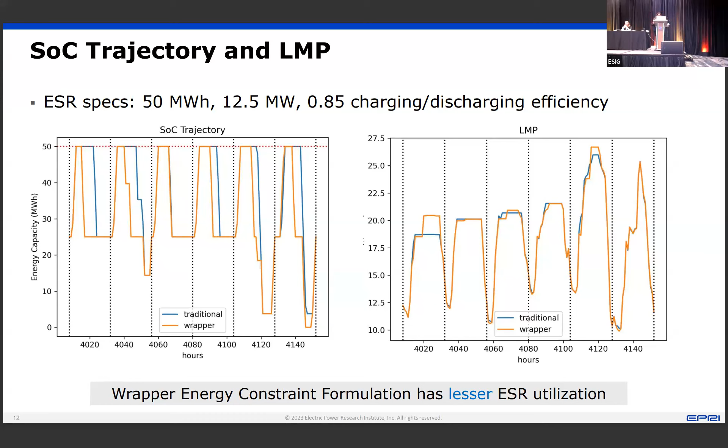So this is going to be a concern. The production costs also are higher. The revenues of the batteries are potentially going to be lower. The utilization may be lower as well.

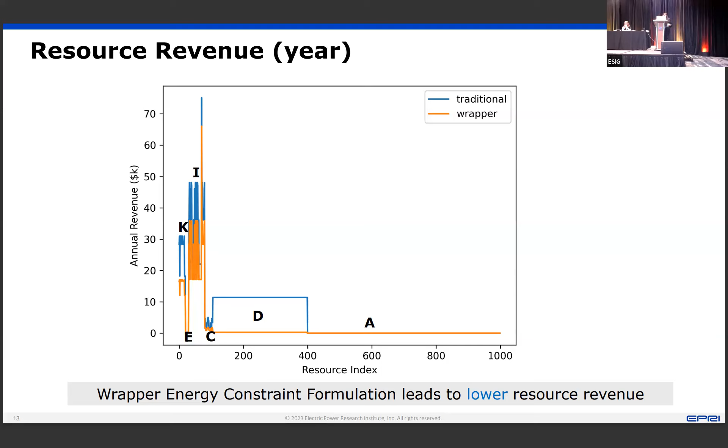So basically what we learned is that this new formulation is promising in a way that it can result in better solutions, but it does require better understanding of the market conditions and forecasts, as well as the risk tolerance of these asset owners.

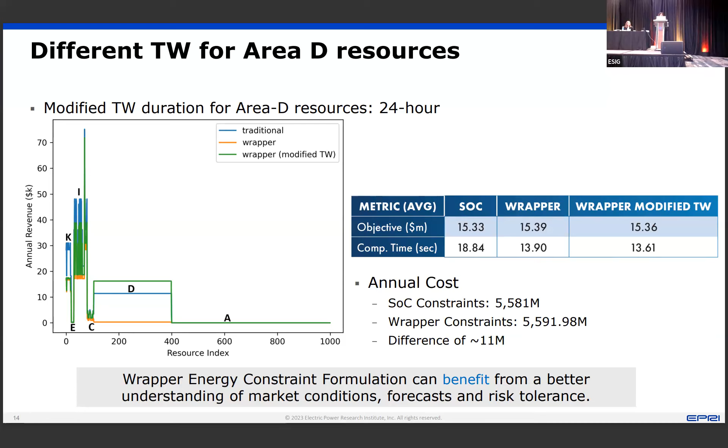Just to conclude, this was us exploring how we could better manage the state of charge of these resources in a computationally tractable manner. This was all in the operational time frame, in the day-ahead and then the real-time market as well.

But where this approach could really be beneficial is in planning problems where you have to look at lots of different scenarios, like Selin introduced. And there is an issue that most of the software vendors are complaining about, especially with chronological modeling with these resources, especially batteries, where some of these planning problems are going to be hard to solve, especially with years and years of data.

So this constraint, there is scope to extend it to be used in the planning time frame. We do want to do some additional work with just understanding the influence of these different parameters, in terms of time window duration, how it would change with dynamic schedules, what role the resource mix plays, and depending on manufacturer warranties, how many times you want to cycle the resource in a day.

So we need to develop some future work on streamlining and automation of these parameter selections, so that the onus is not on the resource owners and the ISO operators to select these parameters, but rather have some decision support tool to guide that.

We did focus on just energy provision, but we do want to explore the use of these wrapper energy constraints with ancillary services provision from these batteries, and then how this would look in real time. In real time, it's not so much of a problem with computational tractability, unless you decide to extend the optimization horizon of the real time, which might be one of the solutions to real-time state-of-charge management issues, and also application of these constraints with hybrid storage resources.